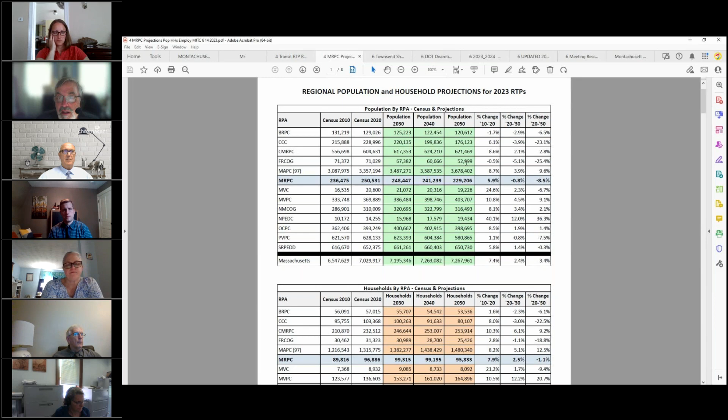Down below is a projection on households. In the 2020 census, there were 96,886 households identified in the region. That's projected to increase slightly in 2030, and then by 2050 drop down slightly below the level it's at now — about a 1% decrease from where we are right now. Again, these are just households within the region.

The next page is a breakdown by community, and I'm sure a lot of you are interested in these numbers. But let me stress that these are not used for financial purposes. It simply is an estimate to help the state with their modeling features. Most of the communities are seeing a slight decrease in time between 2020 and 2050, which goes along with the entire population expected to reduce in the state.

So you can see your particular community listed here. For example, in Athol, the 2020 census has you at 11,945. It's estimated that by 2050 population will drop by about 1,400 individuals. Other communities such as Fitchburg are looking at 41,946 right now, with a decrease of slightly under 2,000 individuals by 2050.

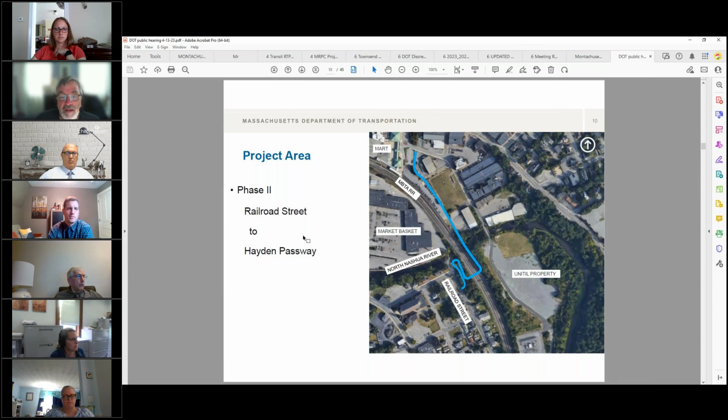So they started with the project background. This is the project area for phase 2. What you see highlighted in blue is the initial concept designs for connecting downtown Fitchburg, down near the intermodal on 150 Main Street or 100 Main Street, to Railroad Street off of Route 12 in Fitchburg, basically from Hayden Passway to the Railroad Street location.

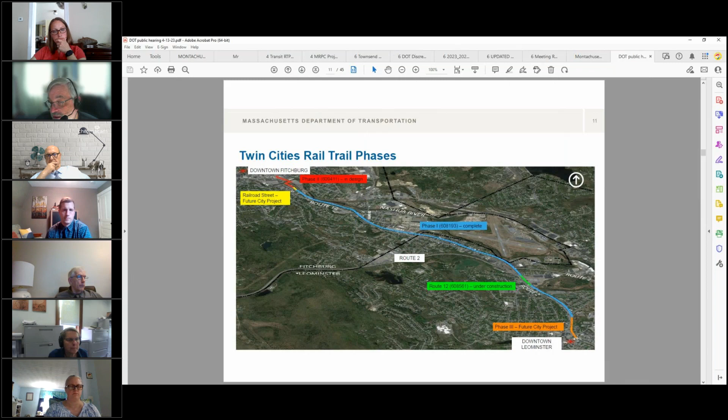This is a concept plan of the different phases of the Twin Cities Rail Trail. What you see highlighted in blue is Phase 1, completed in the last few years. There's a little green section in the middle, some reconstruction undergoing on Route 12 in Leominster. Phase 2 is the section highlighted in red, which is what we'll be discussing. There's a city project scheduled for Railroad Street, shown in yellow. And phase 3 will be a future project to connect the rail trail into downtown Leominster. So those are the different phases of this entire project.

In terms of cost, it's estimated at $25 million for phase 2. That does not include any right-of-way acquisition. It's being paid with federal and state funds from the U.S. Department of Transportation. Luckily, it's not a target eligible project for our region because it far exceeds what we have available in any program year or any TIP year for target funds. So the state is picking up the cost out of statewide funds for the construction of this project.

This is a brief background of how they got to the point they're at now. Back in 2015, they had initial listening meetings in Fitchburg and Leominster on the rail trail. The project was separated in 2018 into phase 1 and phase 2. Back in 2019, they had a 25% design public hearing for phase 1 and phase 2. Phase 1 construction began in 2020 and was completed in 2022. And just recently in 2022, they received approval for a new trail alignment in Fitchburg, the phase 2 project, at 25% design.

Why was the project initiated? Good question. It was to provide connectivity from Fitchburg and Leominster and the phase 1 trail to the MART intermodal station in Fitchburg and downtown Leominster. Without this connection, you're kind of dumped off in incomplete sections on this trail, and it doesn't make the connection they wanted, which is to serve not only as a recreational trail but also as a commuter trail for people traveling to and from Fitchburg and Leominster.

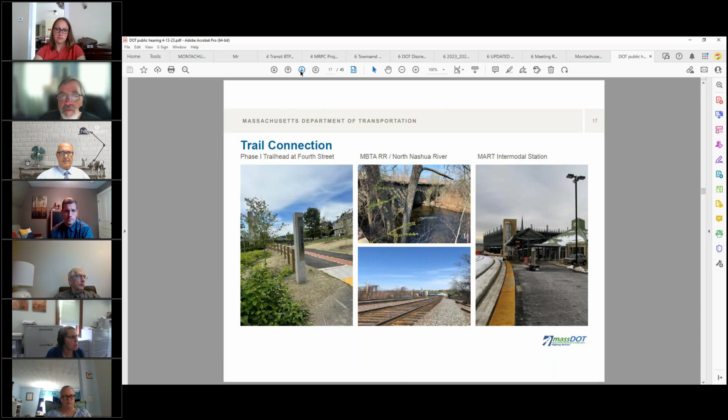They also tried to minimize impacts to the abutters. Unitil has a property near the proposed trail. There's a truck company, and they wanted to make sure they didn't impact their truck movements. And then there's a communications shed for the MBTA, which is important for maintaining commuter rail progress and movement throughout the area.

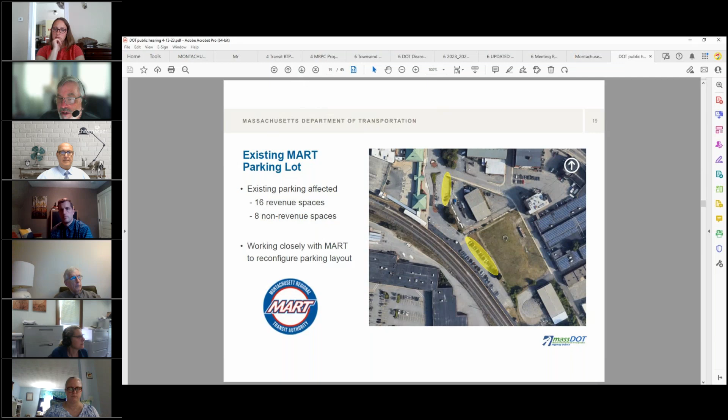This is the one ending in Fitchburg at the existing intermodal center. They were looking at impacting approximately 2 parking lot areas in the intermodal, a total of 24 different parking spaces—16 revenue spaces and 8 non-revenue spaces. They're shown here highlighted in yellow, and they've been working with MART to reconfigure the parking lot and get this design in place.

Since the 25% design, what has changed? What you see up top is the initial alignment talked about in 2019. It comes from Hayden Passway, crosses over the MBTA Railroad, and then makes its way down to Railroad Street near the intermodal area. The problem with the initial alignment: this red square is the track signals shown in the little picture to the right, and those control train speeds and train movement on the rail.

This particular bridge, where it was originally located, blocked those signals, and therefore it was important that it be moved—it couldn't be allowed to block those signals, because trains coming from the intermodal heading eastbound would be blocked from seeing those signals by the bridge where it was initially proposed to go. So they came up with a realignment, which would take the crossing of the railroad behind and beyond the traffic signals or railroad signals, so that they wouldn't be impacted in any way.

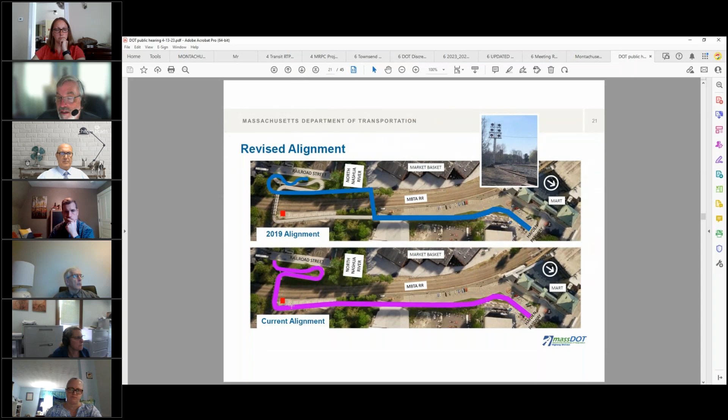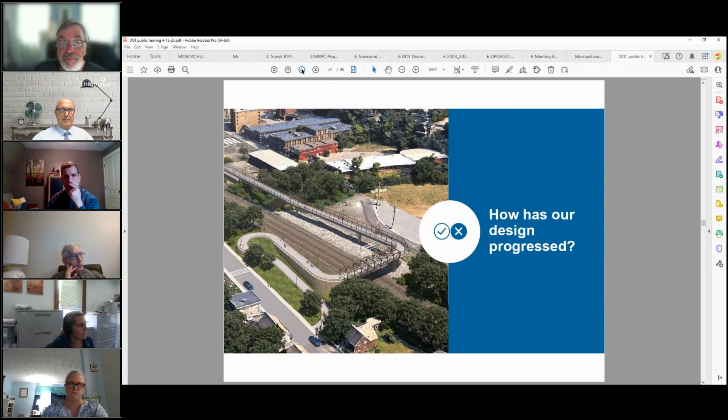Again, the current alignment is you see here, Hayden Passway and Fitchburg coming down on a slow incline up to a bridge, and then over and around to the Railroad Street in Fitchburg.

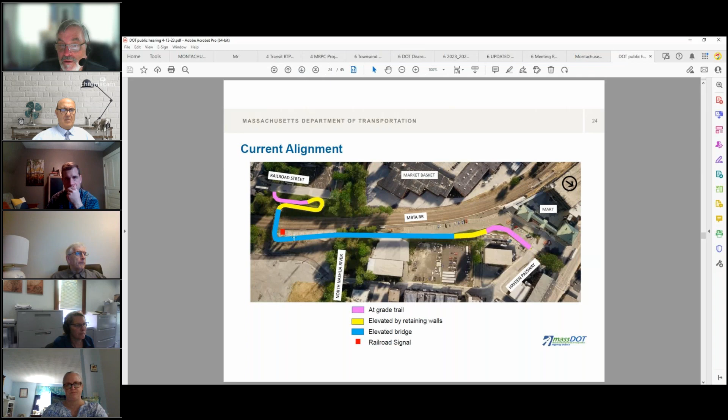So the highlighted areas in pink are at-grade crossings on the at-grade trail systems. There's an elevated retaining wall type section of the trail, making this loop over near Railroad Street and just climbing up from the intermodal area. The blue is the elevated bridge over the tracks. And of course, the railroad signal remains where it is, in the red square here.

These are concept drawings of what they're looking at doing. You can see near Railroad Street, the initial elevated retaining walls of the trail. This is looking at it from the opposite direction.

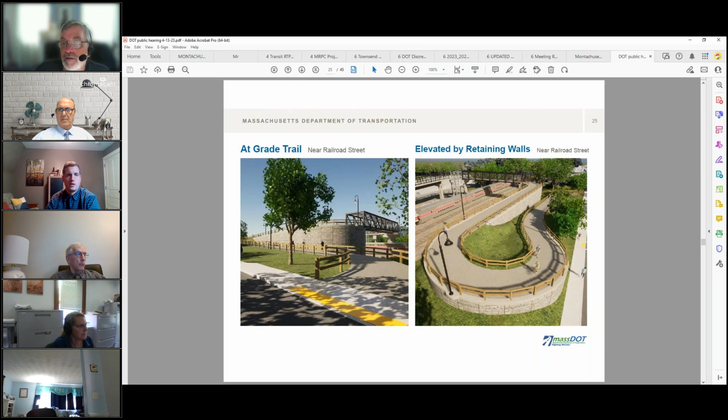The picture on the left is taken from somewhere over here, looking up to the start of the loop and then the crossover of the bridge.

This is the bridge concept that they're looking at doing. It's an open top bridge coming around. They'll be doing wire fencing on the side of the bridge for safety reasons.

I think we want to, as a planning commission, provide some input to MassDOT on this bridge. I think they need to maybe consider some screening on the top of the bridge, because I anticipate certain individuals who might take the opportunity to try and see if they could lob something over onto the railroad tracks, but that's just me and my cynicism.

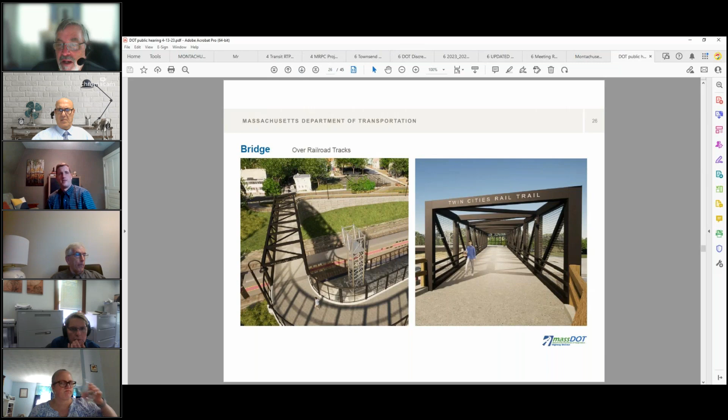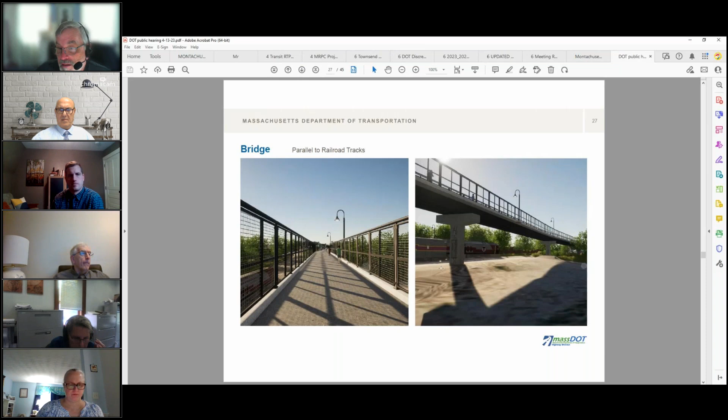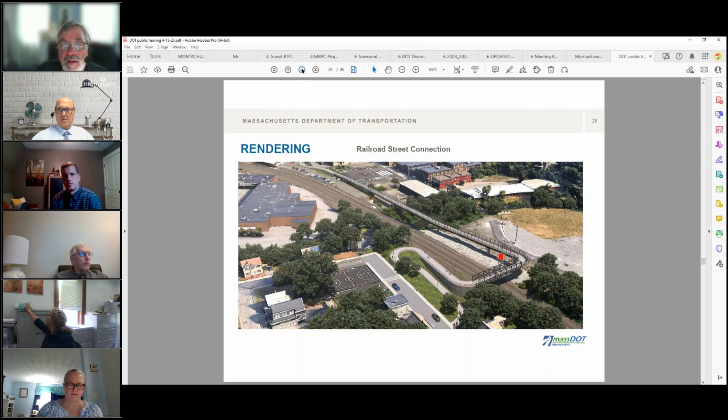Another view of that rendering from the opposite direction. Down below you see this green-roofed building, that's the intermodal center, and the traffic signals, railroad signals, indicated by the red box there.

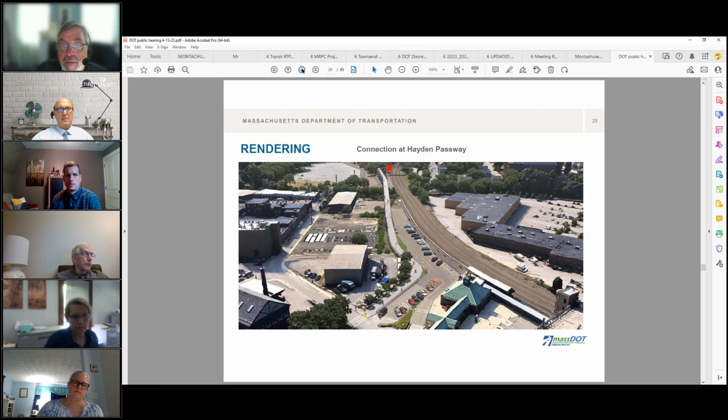I will come back to this. They put together a video of the trail, riding the trail. Let me see, I think I'll run it right now.

Brian, can you see this large picture of the rendering? We can see the rendering, yes. Okay, I'm going to start it and see if I can make sure it moves. Give it a second. Here we go. I'm actually going to pause this for one second, and slow it down. I think it moves just a little too fast.

Let me find out where that was. Oh, over here. I'm just going to slow it down to half speed because it moves kind of fast to begin with.

So again, this is starting at the intermodal center. You can see it over on the right-hand side.

Hey Brad, you might still be on the original DOT presentation, you might have to switch applications. Okay, all right, let me just pause it then. All right, I just stopped sharing and now let me share again. Window. All right, here we go.

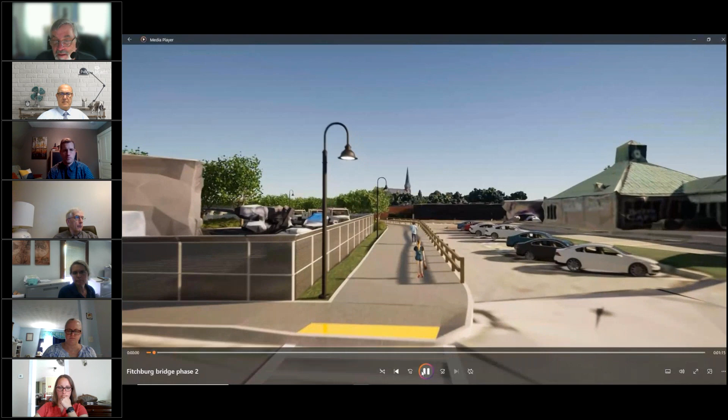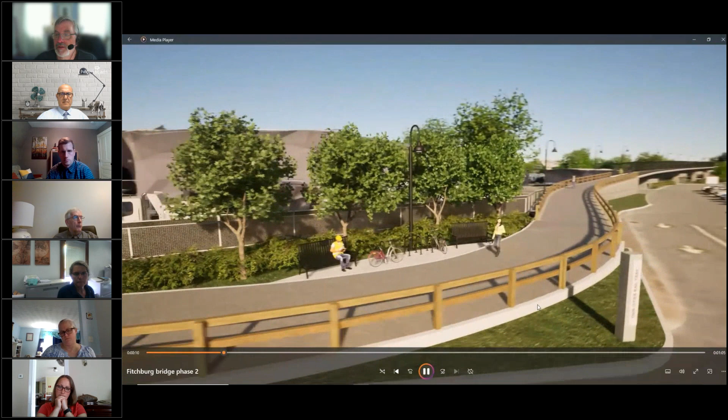Here's the media player. As I said, I did slow this down a bit. So once we get rolling, you'll see on the right is the intermodal center, and this starts in their parking lot area, heading up this slow incline towards the bridge that will cross over the railroad. And they've added spots for benches and people to sit and watch and take breaks.

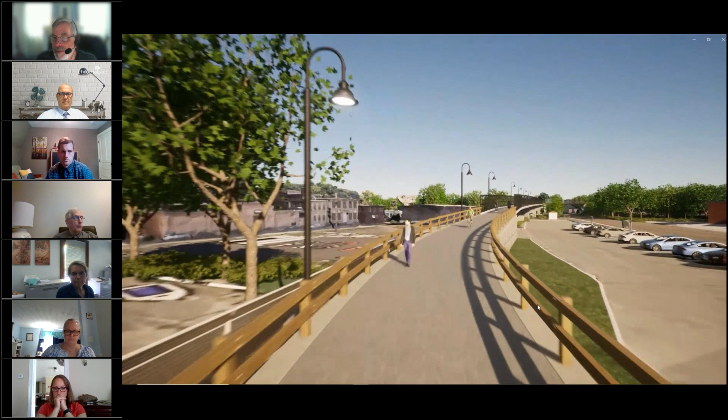Here's the start of the incline coming up to the bridge and parallel to the railroad tracks. That's a fairly wide trail with wooden fencing on the sides.

We'll be coming up to the curve to come to the bridge, where it curves to the right, and the curve helps slow individuals down traveling on the bridge and on the trail. Where the white structure you see on the right, that's the traffic signal bridge communication system.

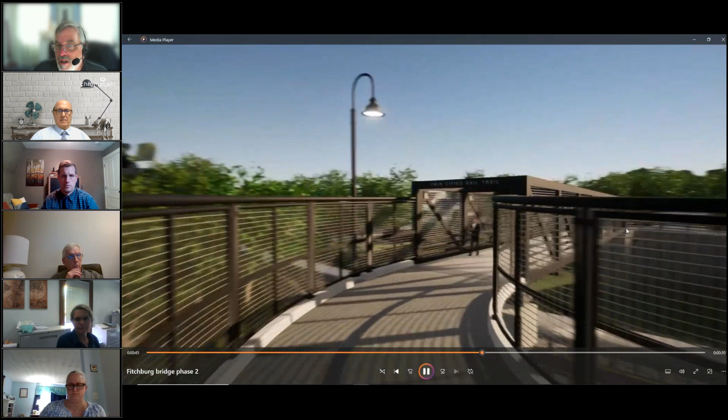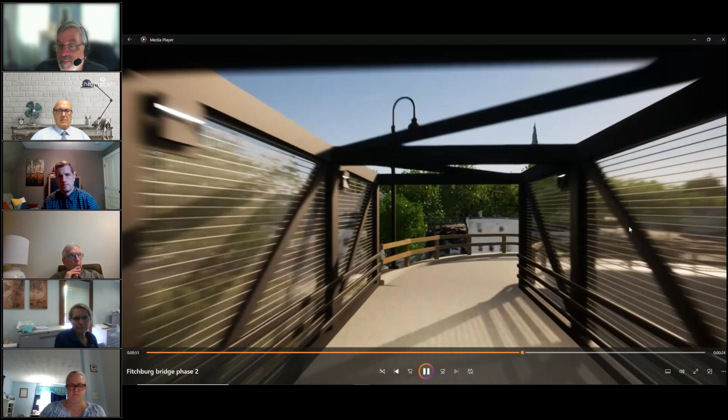This is the bridge coming up over the rail lines. And then back down an incline and around a loop to get back to street level at the Fitchburg City side.

And again, this gets back down to street level and the crossing at the street level, connecting back up with the trains, the rest of the rail trail. I'm going to find my way out of here and go back to the presentation I had.

So that's the little video they put together. The rest of this talks about how individual property owners will be impacted and what will be done. They're obviously going to be discussing with them the right-of-way department and the city of Fitchburg. Pedestrian impacts: the trail is 14 to 16 feet wide, wooden fencing, protective fencing put in place, a bike rack at the intermodal and a bike shelter. At the Railroad Street trailhead, there'll be new crosswalks for pedestrians, new landscaping, and connection up to the existing phase one.

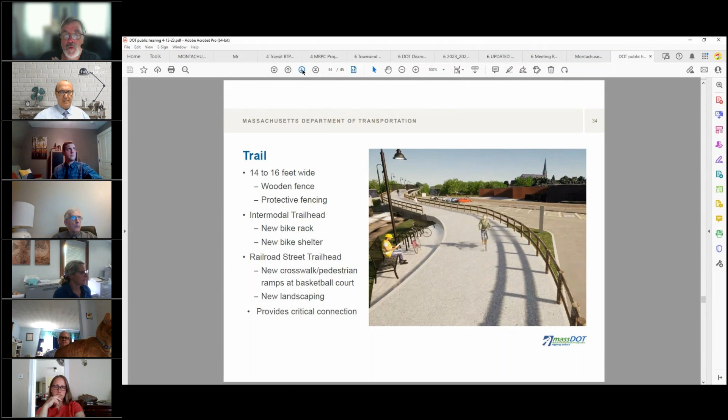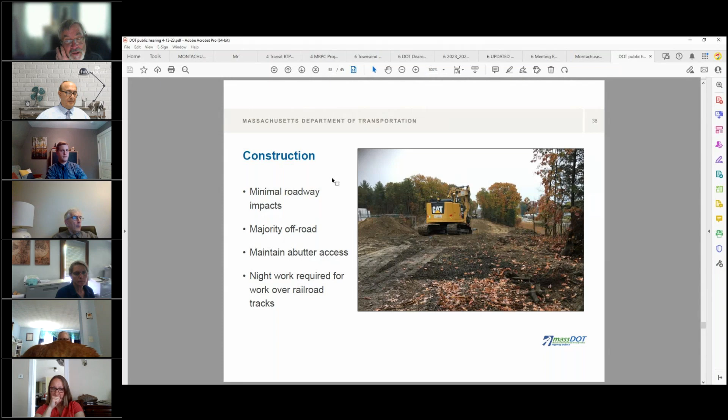The construction approach: they're going to try to minimize roadway impacts. Off-road is most of the project. There'll be night work conducted for the bridge over the railroad tracks.

So again, this is all just for the informational meeting, getting questions. This was the presentation made back on April 13th to the general public. So with that, if there's any questions on this presentation, on this phase 2 information? Seeing none, I will stop sharing and we'll move on.